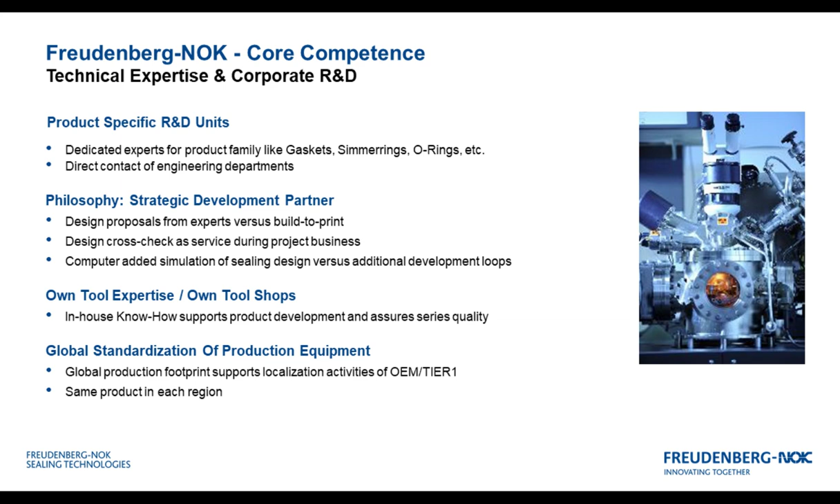Here at Freudenberg, we are the inventors of the radial shaft seal, known as the Simmerring throughout Europe. We've worked with our customers for decades, perfecting technologies that help address the most challenging issues with the internal combustion engine, whether that's weight reduction, fuel and friction reduction, aggressive media, aggressive oils, or high temperatures and speeds. We've been able to meet those market needs.

As the industry goes through transformational change to alternative powertrains, we are seeing some of those same challenges in this market. But this change is also driving considerably new needs for materials and products that can address these new technical issues. So I want to briefly talk about the market and how our company is addressing the shift away from the internal combustion engine.

Here we have a prediction of powertrain mix between fuel cell, battery electric vehicle, hybrid, and internal combustion engines, going up to 2035. Although no one knows the future, we can see the trend of e-mobility is already happening and gaining momentum. At Freudenberg, we see three different forces driving these changes: governmental regulations, new players in the automotive market with lots of funding behind them, as well as societal change.

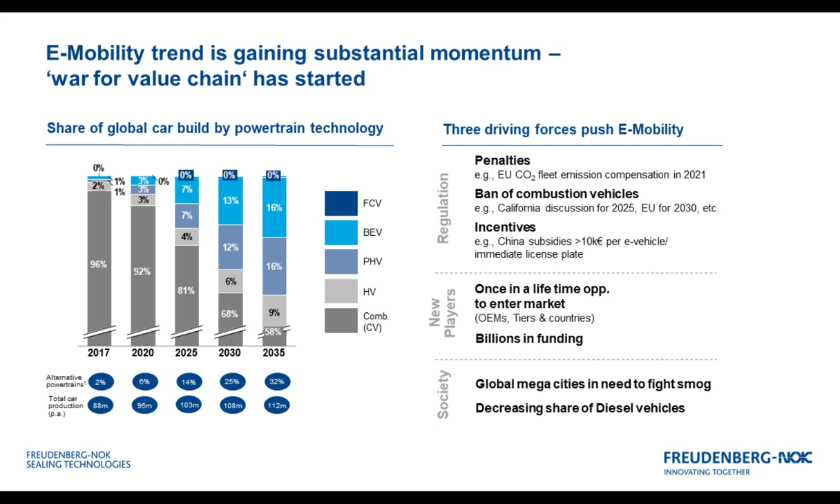In the transition to electric vehicles, we see at Freudenberg two key applications that are disappearing for us, and those are engine and transmission. As you can see from the product portfolio here, there's a variety of seals, a variety of products that we make that will no longer be around if there's no transmission, if there's no internal combustion engine.

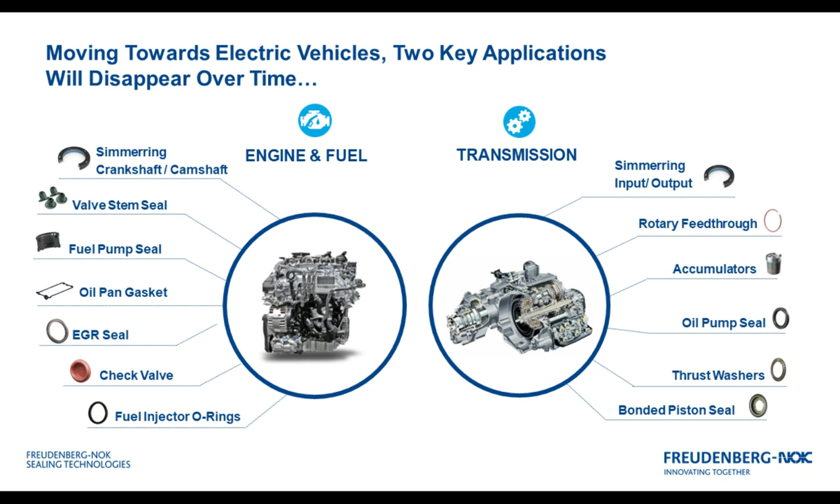With those applications going away, we see a significant erosion in our sales. In our worst case estimations, you'll see on the left here a complete internal combustion engine vehicle market going to a battery electric vehicle market. We could potentially lose 70% of our sales if we did nothing to meet those market needs.

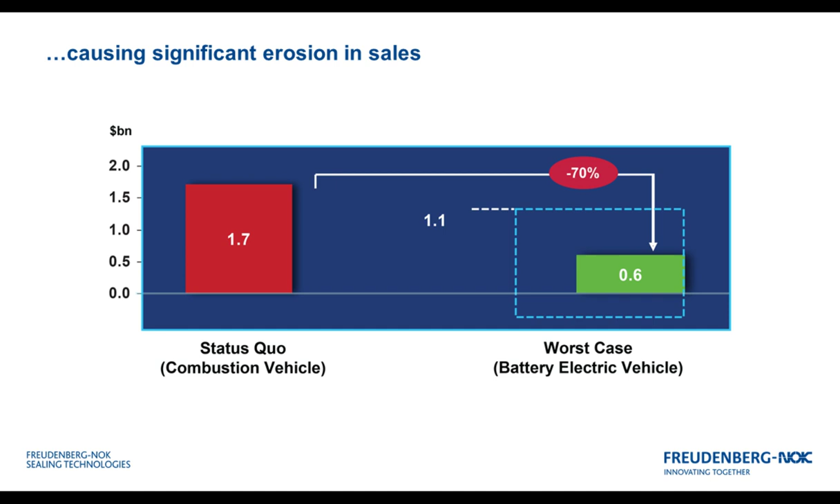Fortunately, at Freudenberg, with a 169-year history of successfully reinventing itself, we are doing that again to meet these new market needs.

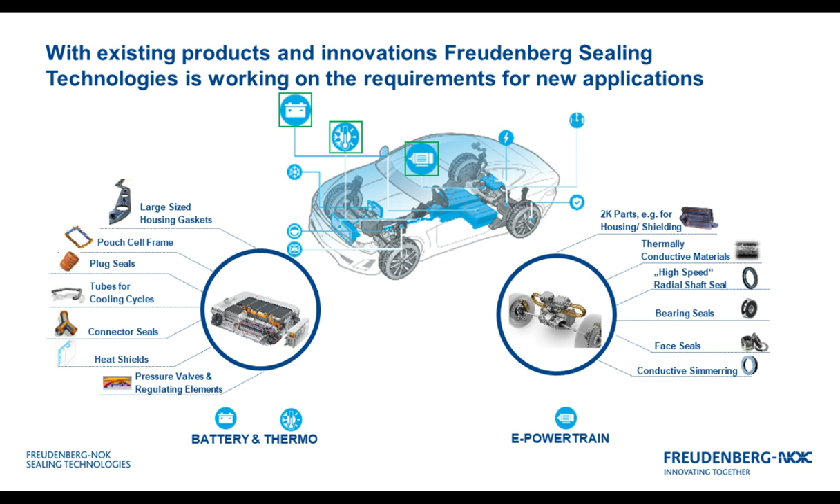With our new products and innovations that Freudenberg has used existing technologies to come up with, we have developed a product portfolio focusing on two specific segments within battery electric vehicles: the battery and thermal management systems, as well as electric motors and e-powertrains. Here is some of the variety of products we make, and I'm going to dive deeper into two specific products, one for battery and one for e-powertrain, that address customer needs through this transformational change.

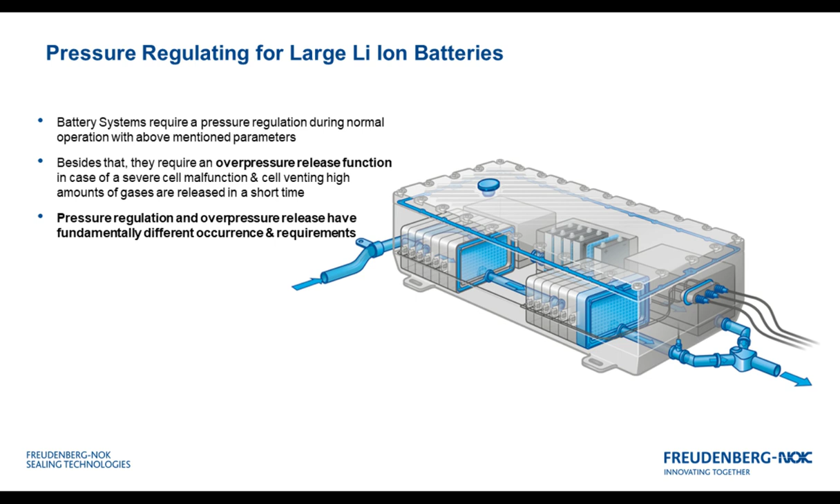One challenge our customers face is dealing with large lithium-ion battery housings. There are two main functions required for pressure regulation in these large housings. First, with any sealed housing, you need a breathable element to allow air in and out to regulate pressure during normal temperature increases and decreases. Second, a function only required for lithium-ion batteries: when a cell decides to vent, it releases a large volume of very hot gas very quickly, requiring an overpressure release function to release this gas and maintain low pressure within the battery housing.

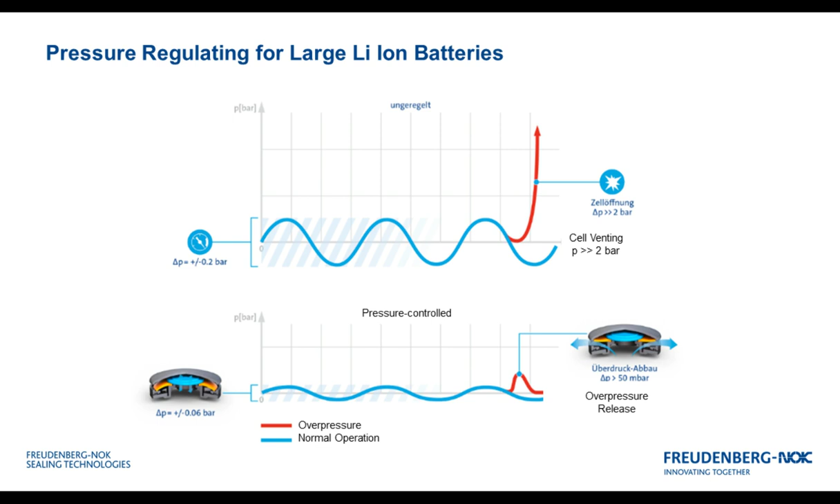Here on the bottom is a pressure-controlled housing, where during normal breathing cycles or daily temperature cycles, you see small pressure differences in the housing. Then in the event of a lithium-ion cell venting, you see a small pressure increase, but no overall pressure gain, preventing damage to the housing.

Here you can see the way we accomplish this pressure regulation at Freudenberg - a technology we call the DIAvent. This is a cross-section of the DIAvent, where both functions of normal breathing and overpressure release are accomplished within the same unit. That first function of breathing is accomplished by this pressure regulating section, a breathable nonwoven membrane that allows gas in and out of the housing to regulate pressure during normal daily cycles. This will also not allow any dirt, debris, or water into the housing.

The secondary function is accomplished by a silicone umbrella valve, pictured here in orange, that will open up and allow a large volume of gas to be released very quickly. Since it's an umbrella valve made of elastomer, it will come back down and seal after that large volume of gas has been released, maintaining that seal. This unit is rated to IP 6K9K, so we can maintain the integrity of that battery housing.

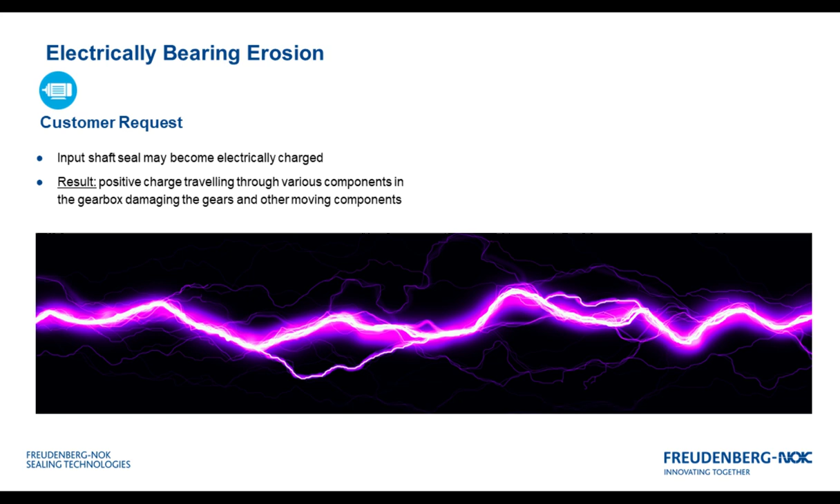So we've actually developed 3 different generations of this technology, varying in electrical resistance from the shaft to the housing, from 1,000 ohms to less than 1 ohm. And we do this by varying the material of that carbon fiber nonwoven in our design.

And we've even found that our generation 3, which we estimate around less than or around 1 ohm of resistance from the shaft to the housing, has even been beneficial to our customers for insulating electromagnetic interference from leaking out of a housing between the rotating shaft and the housing, where your traditional radial shaft seal is located.

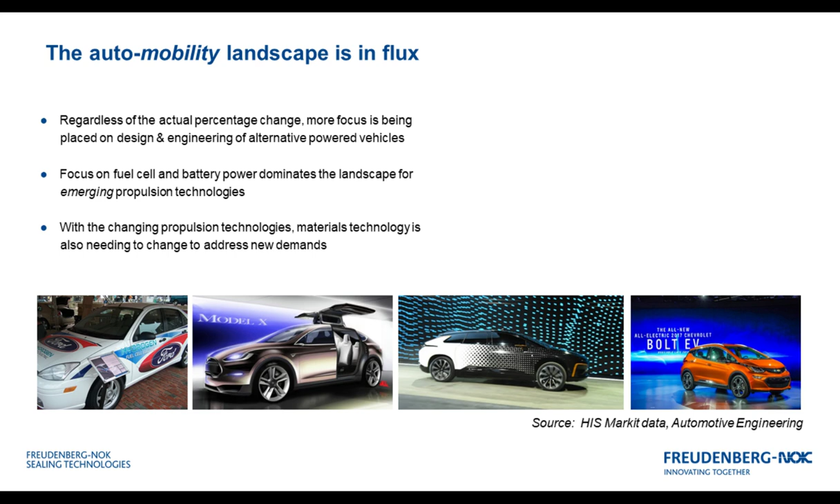At Freudenberg, we see an increased focus on fuel cells and battery technologies, which really dominate the current emerging power landscape. These changing propulsion technologies drive changes in material technologies that also have to advance at as rapid a rate as possible to address these heretofore unknown demands.

There are many needs for advanced materials during the evolution of this new automobility marketplace. A few of these opportunities are presented here. Let's look at some of the key opportunities.

So first, we see the battery. We see that sealing the battery elements and thermal shielding and thermal management are all opportunities.

Next is the need for smart materials. These materials not only provide a traditional sealing function, but also allow communication between the seal and the vehicle controllers, not to mention the whole Internet of Things relationship and metadata that can be obtained from the vehicle. I'll discuss this in a bit more detail in following slides.

The motors themselves present some demands for new materials as well. One such demand is for the elimination of electrical interference, which is important for sensors and also the entertainment system. And Mike just talked about that with some of the e-nonwovens that we've got. So another one that I'll address in more detail later in the presentation.

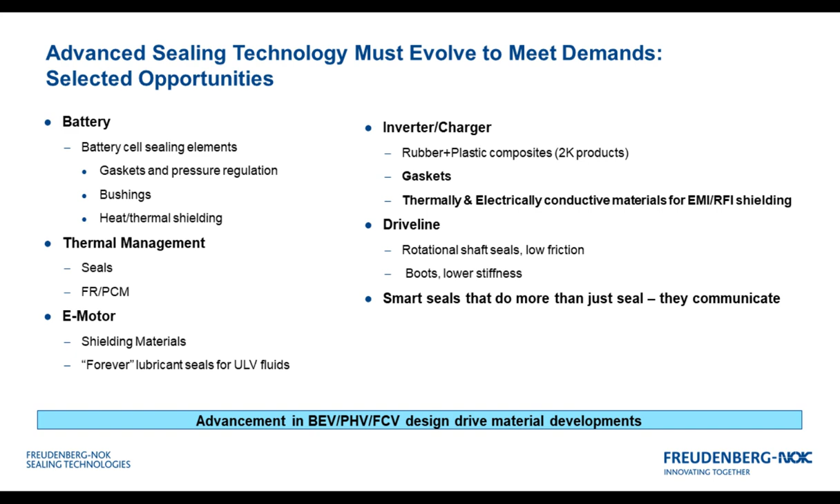In the driveline area, the challenges are for lower friction seals, lower stiffness boots, etc., all to minimize the power demands during function to basically improve the overall efficiency. So thermal management is clearly a reoccurring theme, and I'll address this shortly. In general, advancements in battery electric vehicles, fuel cell vehicles, plug-in hybrid vehicles, all of these are driving new material developments.

So first, let's discuss some of these smart materials. Smart materials are materials that have augmented functions. So they not only seal, but they sense changes in their environment, and then they respond in a very predictable, reversible, and controllable manner.

Some examples of these smart materials and their functions are shown here. So you have magnetic elastomers, you have electrically conductive elastomers, you have dielectric elastomers, and then you have special thermal management systems, which could be phase change, fire resistance, extreme temperatures, or what have you.

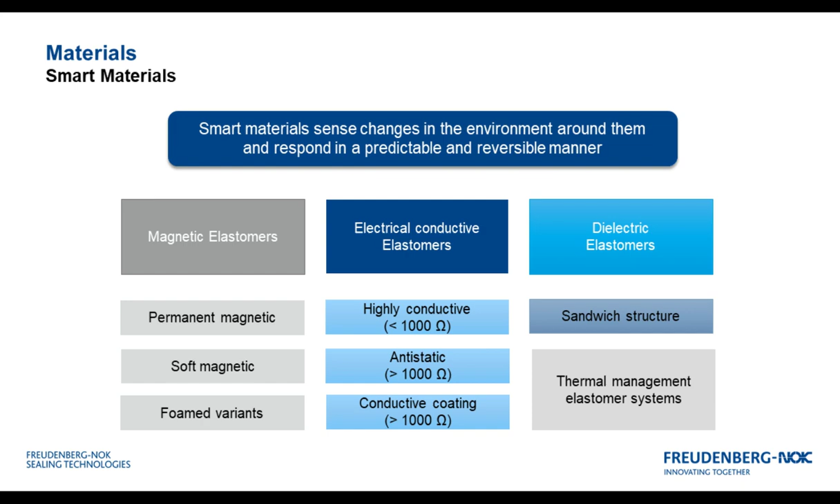So if we, as an example, look at one of these smart materials, a material that more or less gets intelligence from magnetism. In this case, we've developed a special magnetic filler. We designed this and incorporated it into the rubber and imparted some special magnetic properties. This is different than just adding conventional ferrite or something like this.

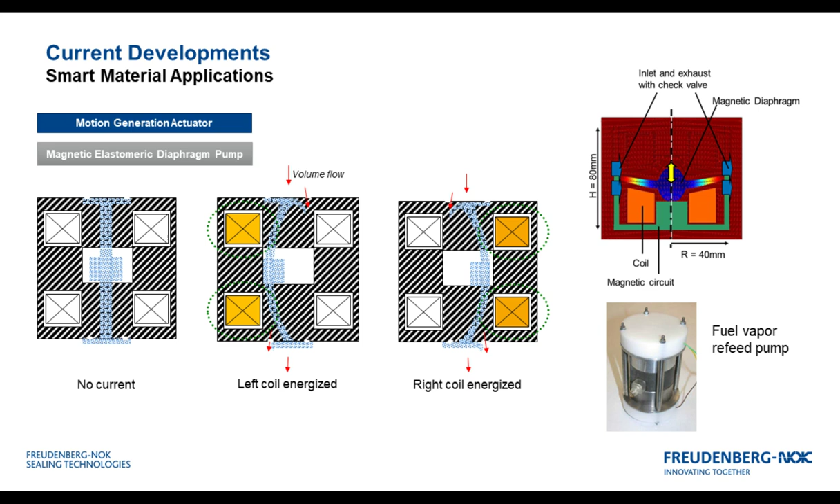This is truly unique. So by making use of these magnetic properties, now smart rubber materials enable activation of things such as sequencing valves, some of which are shown here. Signals such as frequency of activation and sealing force can now be extracted and utilized by the vehicle controller systems.

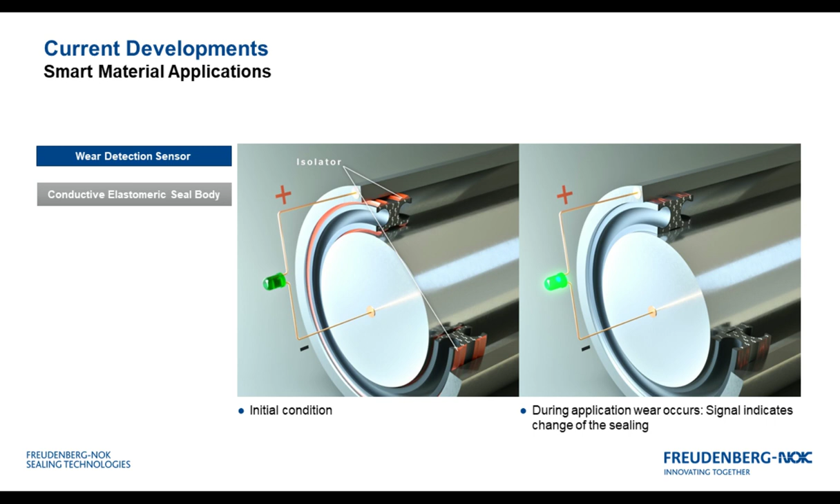Another smart material enables the vehicle to detect wear, in this case, a rotating shaft sealing element. In this application, the elastomer is a composite construction where one part is an electrically insulating elastomer and the other is an electrically conductive elastomer. The materials technology here lies in both forming the composite structure and in developing the electrically conductive material.

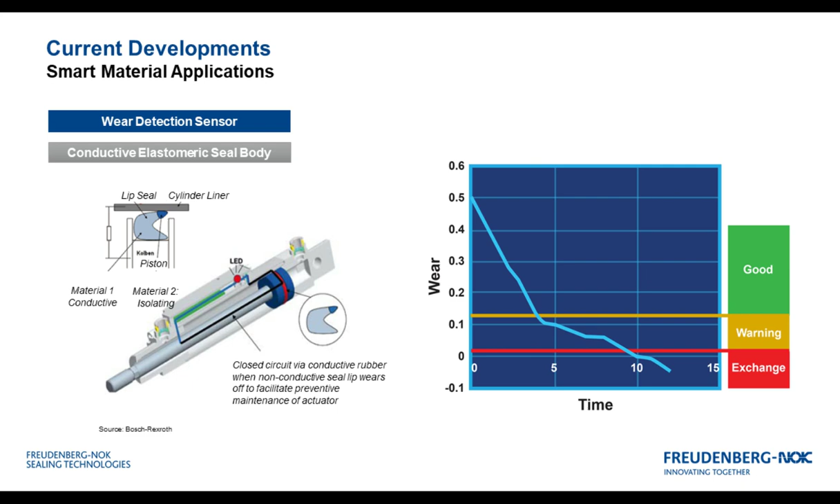In yet another example of smart materials, I'm showing an advanced dual material alloy composite for detecting and communicating sealing deterioration. In this application, the principles discussed previously on rotating seals are applied to a reciprocating seal.

In North America, we have the AM frequencies, which are unique to our world, and the reliability of these communications requires that interference be protected against so as to maintain the reliability we depend on. Smart material technologies have been designed to address this risk.

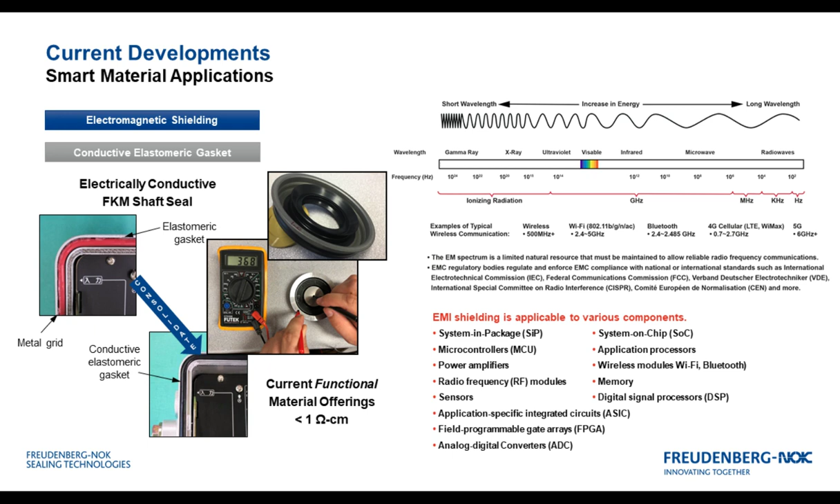Thermal management has been talked about quite a bit in our drivers, and it's increasing in safety importance as well. In the following slides, I'll discuss some applications, but due to time constraints, I've only picked the ones that are of the most critical importance.

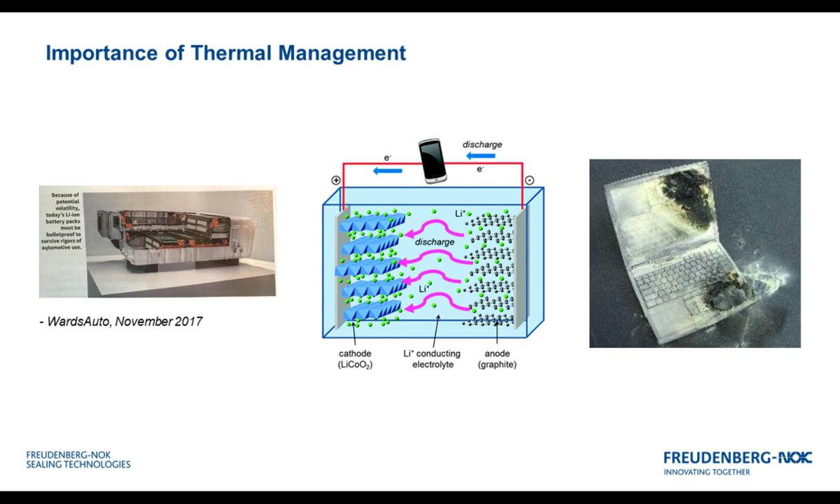Clearly, thermal management of batteries is needed, especially with lithium-ion batteries getting some unfavorable attention today. Freudenberg is developing thermal management technology to address safety concerns, as well as other battery technologies, by designing novel fire-resistant materials and extreme temperature sealing materials.

We've designed special flame retardant chemistries meeting very stringent regulatory requirements to address occupant safety. Here is one such example of a flame retardant material that was originally developed for aerospace engine applications. Freudenberg is in a unique position to leverage and really harvest its material technology from its other markets to shorten the time to market for addressing new automotive needs.

This is an example of that. This material is a composite rubber alloy with a conventional silicone rubber interfaced with a layer of an elastomeric intumescent material.

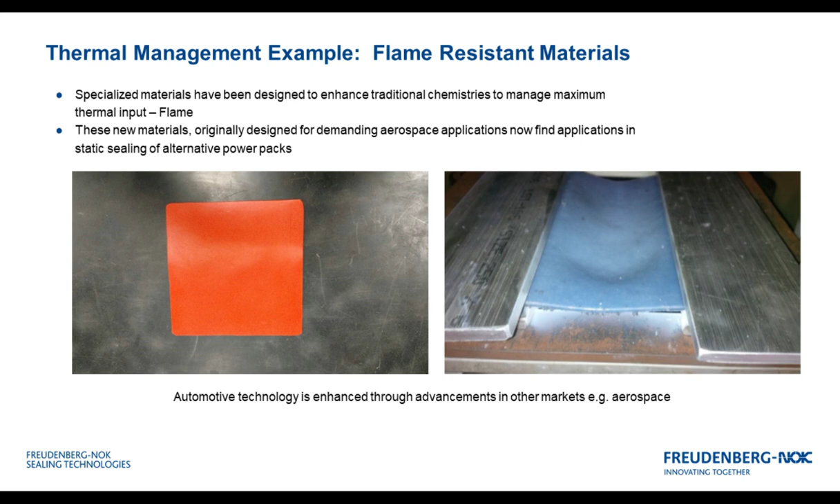Shown here is a series of pictures that show the response of this rubber composite alloy. In the upper left, you see about a 1500 degree flame being applied to the intumescent material. This thickness is only 2 millimeters. The top of the intumescent layer was 1,000 degrees cooler than the bottom where the flame was applied, in just 2 millimeters of thickness.

Shown in the middle is a conventional UL94 so-called flame retardant material that had the same exposure to the flame, and it burned completely through. The photo on the right shows the side that intumesced—this is the side directly exposed to the flame—and the lower picture is the top of that 2 millimeter test sheet. Clearly, there was substantial protection there.

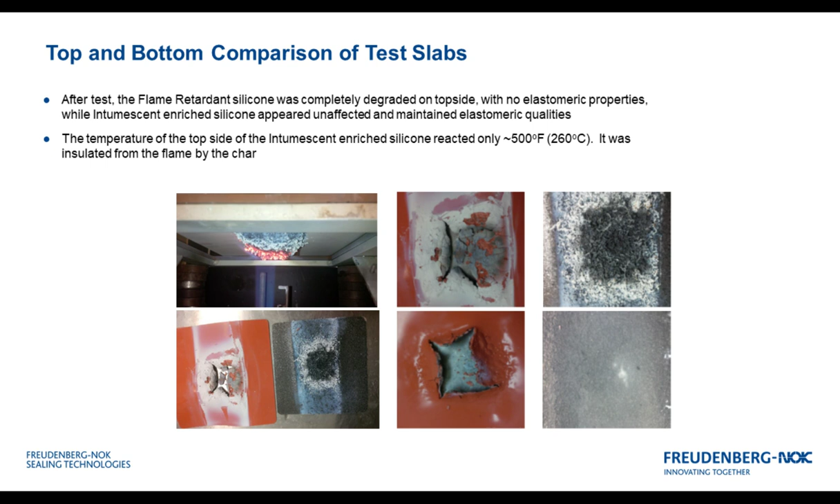The new technology affords substantial protection from raw flames in safety-critical applications with no toxic substances being liberated. This new material can be fabricated by conventional molding techniques as well as by extrusion, which is shown here. So the diversity of fabrication methods allows for a wide window of design opportunities.

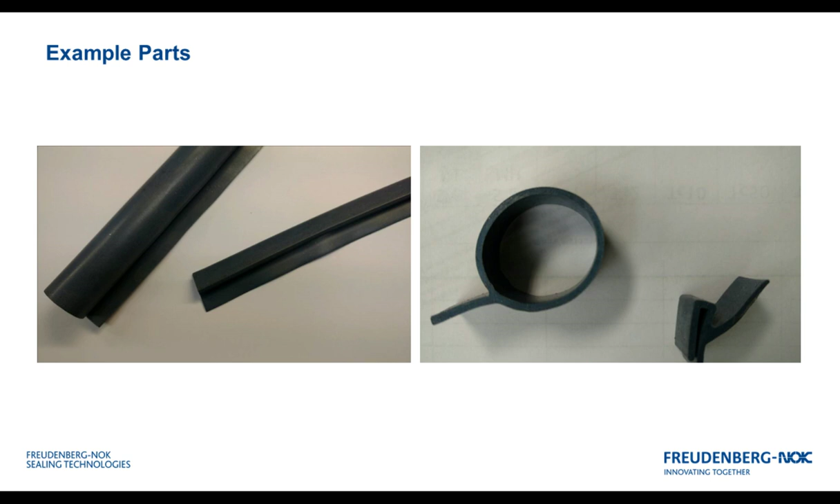With underhood temperatures as well as higher shaft speeds being driven by today's new engines, Freudenberg again takes the cue from our other markets with the design of extreme temperature seals. These are seals that are expected to continuously operate at temperatures exceeding 205 degrees C.

Here are results of some extreme temperature testing. These fluorocarbon-based compounds offer exceptional chemical resistance as well as sealability. You can see here compression sets that have been done on O-rings. O-rings were chosen because it's the most severe, after exposure to 250 C, almost 500 degrees Fahrenheit.

The values are less than 30 for the special low-temperature polymer. In addition, one can see in the upper right chart that the retained properties are very good even after 1,000 hours at 250 C, which is defined by SAE J2236 as the continuous upper temperature limit for elastomeric members. The flexibility and hardness is measurably good, so these materials would be expected to operate continuously at very high temperatures.

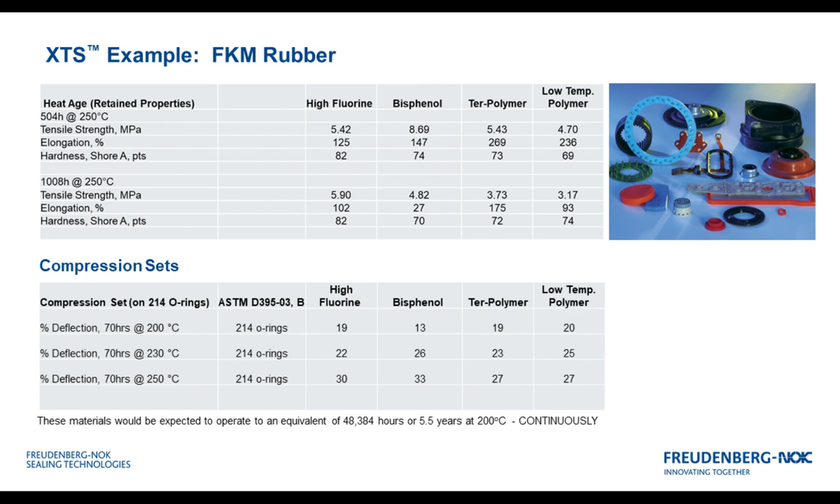So at this point, I've discussed some of the advanced materials that I felt would be of significant interest to you. My specialty has been with the rubber materials, so now I'd like to introduce Ray Sparagowski, who will continue the discussion on our new high-performance thermoplastic materials. Thank you, Joe. I appreciate that. My name is Ray Sparagowski. I'll be talking today about high-performance plastic materials.

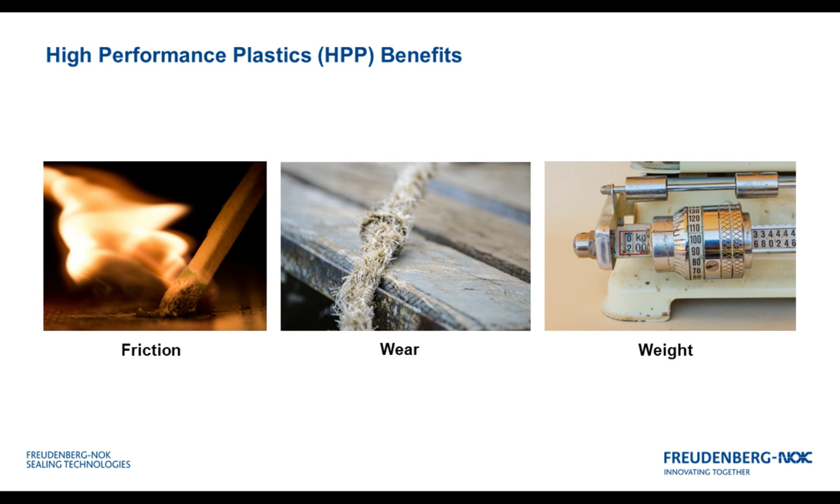These are injection moldable or compression moldable materials. My concentration will be in the areas of friction reduction, wear reduction, and weight reduction, the use of the materials to do these things, and moving these materials to extreme operating conditions, which allows you to move them into applications where they traditionally would not be used in the past.

One of the key benefits we need to use these materials and get the benefit from them is to understand the effects of wear. Freudenberg has developed their own wear standard for doing so. The main reason for doing this is to eliminate noise and variation when we add fillers to the systems, to really understand the key failure modes of these systems. That way we can know what the impact is of a filler and how that will affect the failures.

There are two key testing conditions we want to look at: dry, what we have when we do not have lubrication, and then lubricated or wet wear. The standard we developed, the primary importance is to control temperature. The data I'm going to show you today will be at temperatures at 150 degrees Celsius. That's our standard that we normally would test to.

This test method uses a disc of material with 6 grooves. This is to eliminate debris from getting into the test condition, to further reduce the noise and variation so we can understand what the materials are doing. The counter surface is a metal counter surface that can be different hardnesses and different materials. Typically, we'll use a D2 steel at a Rockwell hardness of 23. That is a ring-shaped member that goes against that disc.

It is important to note that surface finish is particularly controlled in these tests. We do not use a radial or lathe-type record player finish; we use a linear finish. This is intentional because we want this to be an aggressive test. We want the material to have to go with and cross the grain with every revolution. That's to be more aggressive, to get better understanding of wear conditions.

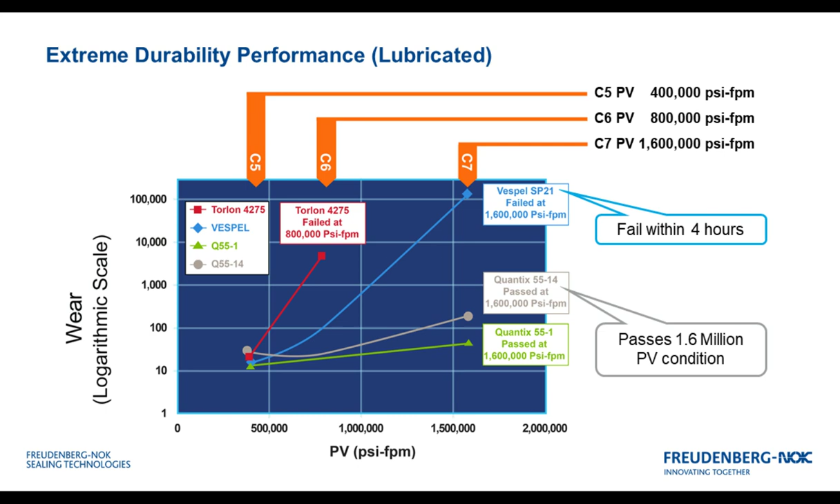We accomplish this by clearly understanding how the failure modes occur. By knowing what the fillers can do, we can develop these materials to have extremely high condition and operating performance.

On the next slide, we are looking at the effects of using the same technology in a PTFE material. PTFE is commonly used for dry applications. It has low friction, but it does not like high loads and rough surfaces. So traditionally, if we conduct a lubricated test with the Rz 7 test, you see the results we'd get on a material. In yellow is our example, Quantum 19-1. That wear rate is in the tens of thousands, very, very high, because PTFE cannot handle that rough surface, it will destroy the PTFE material very quickly.

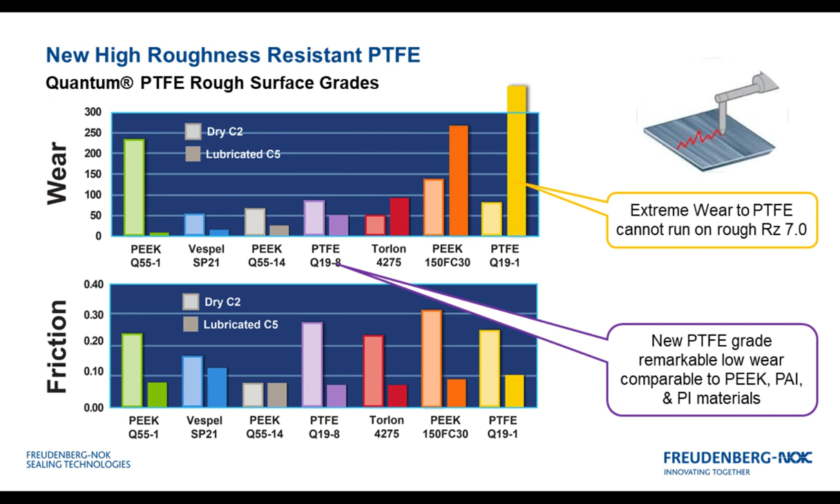But using this technology, we recently developed Quantum 19-8, shown in purple in the middle of the graph. This material actually performs wear at a level of traditionally injection moldable thermoplastics like Vespel, Torlon, and PEEK. So you can now see an extremely high roughness-resistant PTFE that can be used in applications where it traditionally wouldn't in the past. We're taking advantage of this for new applications where we may want to replace metal spacers or other items with PTFE along with our other thermoplastic materials.

Weight reduction is still very important too. As we start to look at parts and where we may have not traditionally considered using metal, plastic material in a metal application, we may be able to do so as we move to these more extreme materials that can handle wear and keep friction reduction. But they also allow us to take weight out of the system. So I've got three examples here to show you how the weight can be managed and you can take advantage of this technology.

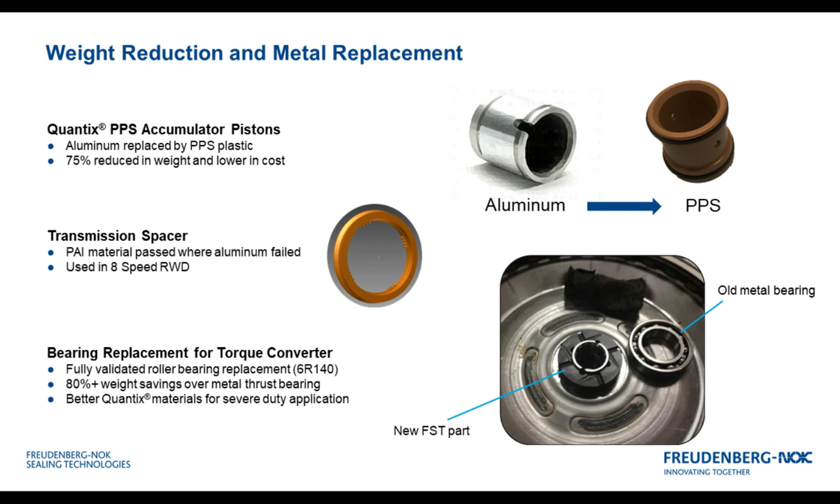These examples really rely on a lot of the material technology, but I'm going to now move to how we use material technology in combination with design to make these go even further. In the next examples, we're going to talk about two products that we have that are designed to lower friction and to reduce energy usage.

Levitorq is a low torque thrust washer design that we use. These allow us to take fluid pressure and fluid film to generate fluid films under the washers and seals, and this allows us to lower friction. So Levitex is a seal ring design using that technology, while Levitorq is a thrust washer design. We'll go into that in a little more detail in the next slides.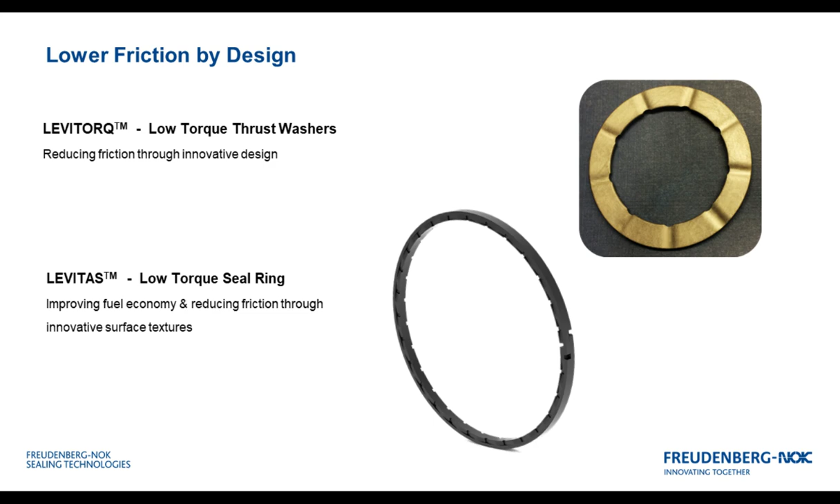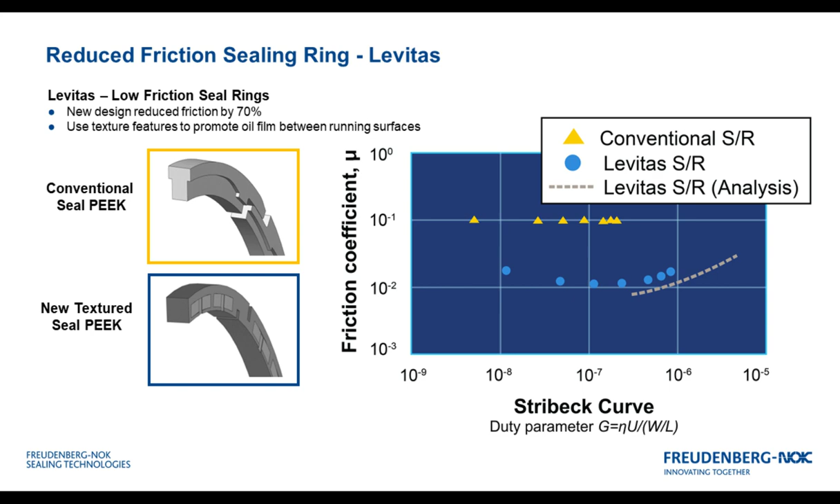The next slide is an example of how this technology works. When you look at the graphic, pressure is allowed to go into this ID geometry on the material, and is forced up a slope to create a pressure pocket. This pressure pushes the fluid under the riding surface of the seal, allowing us to create this lower friction as you change the RPMs and the condition.

We will now play a short video to show you how this actually works.

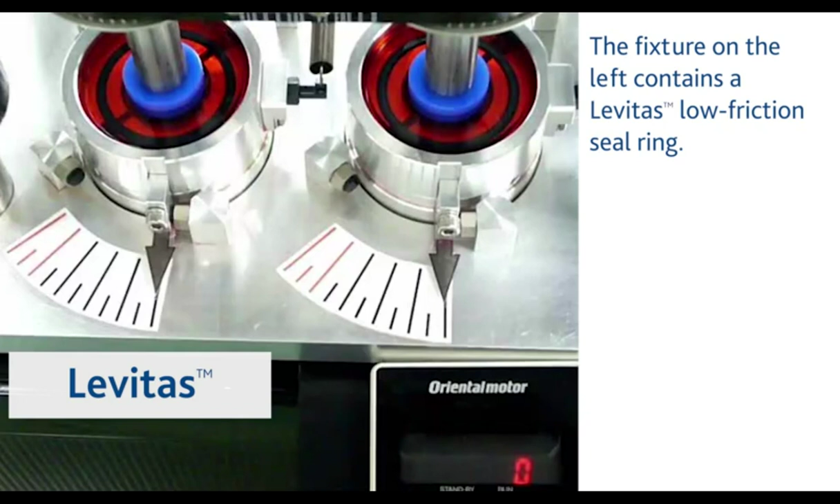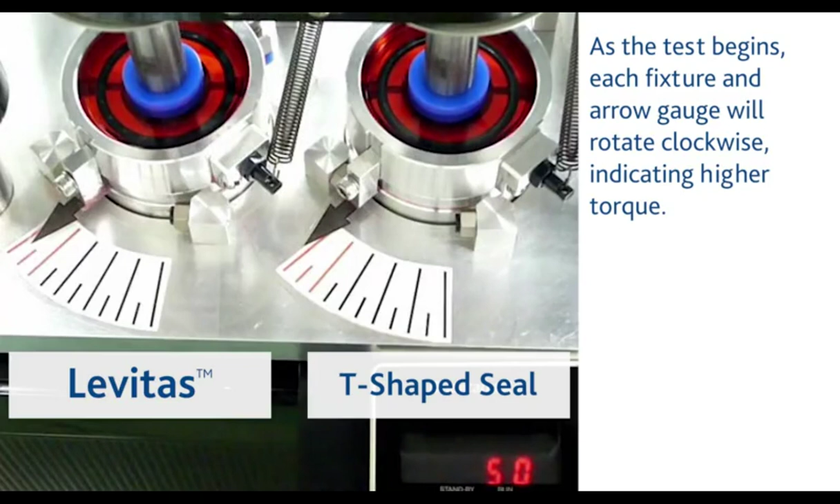The fixture on the left contains a Levitas low-friction seal ring. The fixture on the right contains a traditional T-shaped seal ring. As the test begins, each fixture and arrow gauge will rotate clockwise, indicating higher torque. The display in the lower right indicates current RPM. As the RPMs increase, there is a reduction in torque within the Levitas seal fixture. This is indicated by the arrow gauge moving counterclockwise due to lower friction.

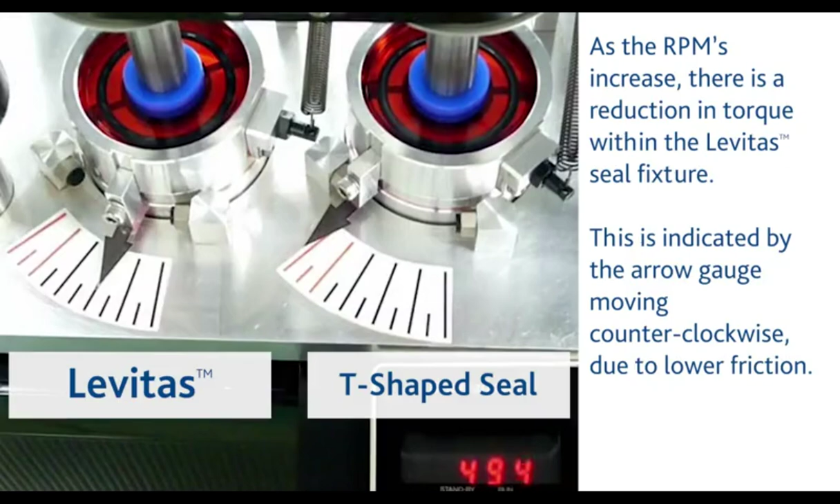So as you could see in that video, the effect of using fluid to do work to lower friction was observed. We are promoting fluid film under the seal ring, just as we do under the thrust washers, giving us this result of the frictions that you saw.

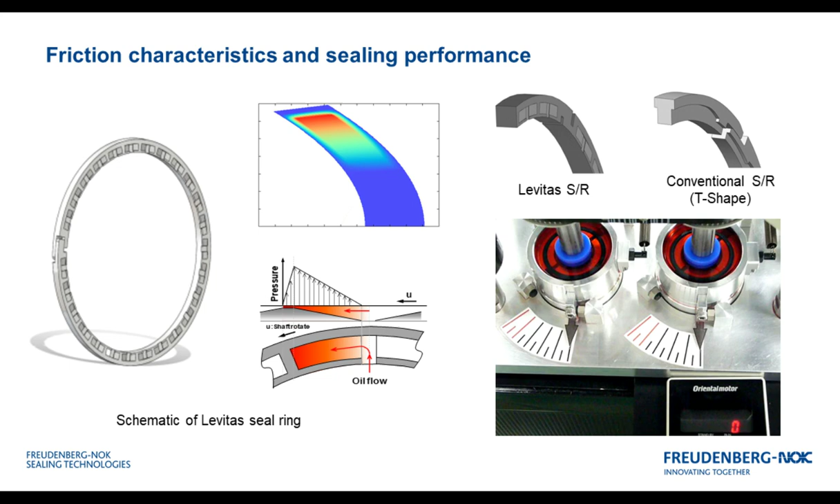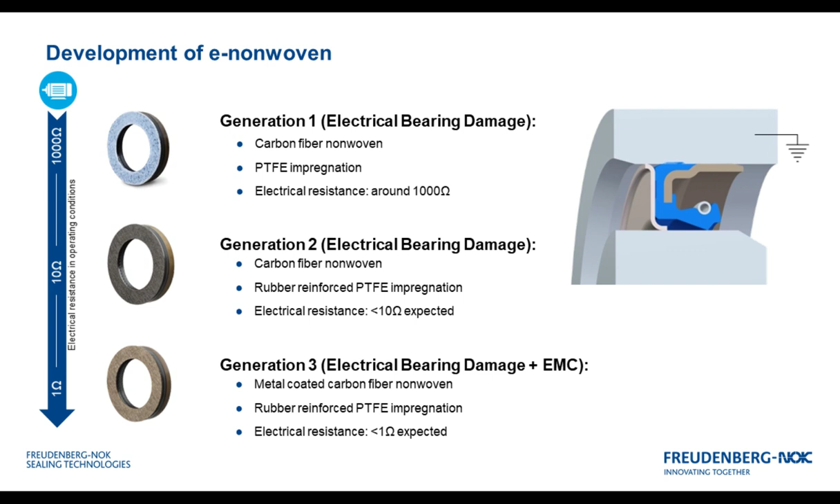Very good. Thanks, Mike. And our next question is for Ray: can these new low friction and wear seals be used in existing internal combustion engines, vehicles, and drivetrains to improve efficiency and fuel economy of existing vehicles?

We're hoping we'll be in production here shortly. They see the benefit in this technology that the material can offer. In addition, we have several customers looking not only at the effect of the material itself, but the design impacts, like the Levitas I mentioned earlier, the low friction seal rings. So that activity in transmission is actually ongoing now, and we have active work with customers.

Thank you, Ray. And Mike, we have another question about the Diavent product offering. Someone wants to know, what material is the Diavent housing made of?

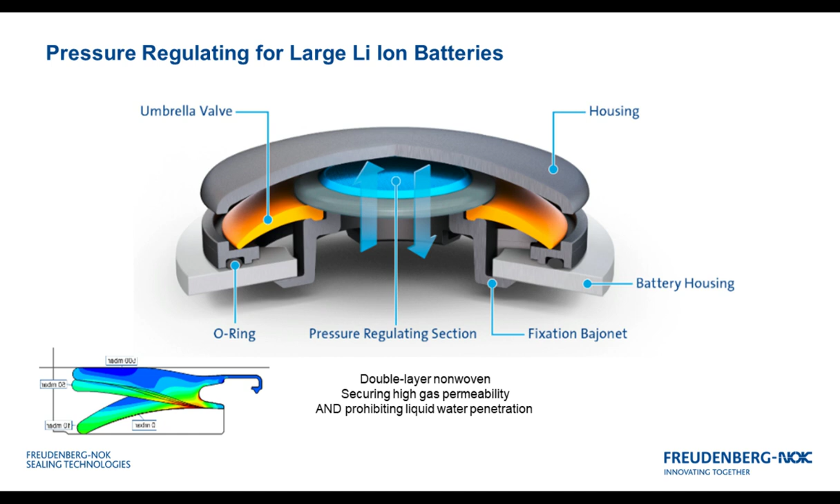Yes, thanks, Lisa. The Diavent housing is made out of PA, commonly known as nylon 6/6 material. This is a standard type of product that we've made. If there is something required for a specific customer inquiry, we can look at changing the design to accomplish both of the functions of breathing and emergency release in a unique design for a customer.

Okay, thank you. And Ray, you have this next question. How does Freudenberg's wear test results correlate to actual part testing?

Oh, good question. Well, we know that the method we use is aggressive. So when we are testing, we are concerned whether we really see the effects of actual part performance. So we end up not only doing the wear standard testing that we've talked about earlier, but we then actually validate parts, and we've seen that we can correlate the wear performance to the actual part performance. But it's important to note it really is about understanding failure modes.

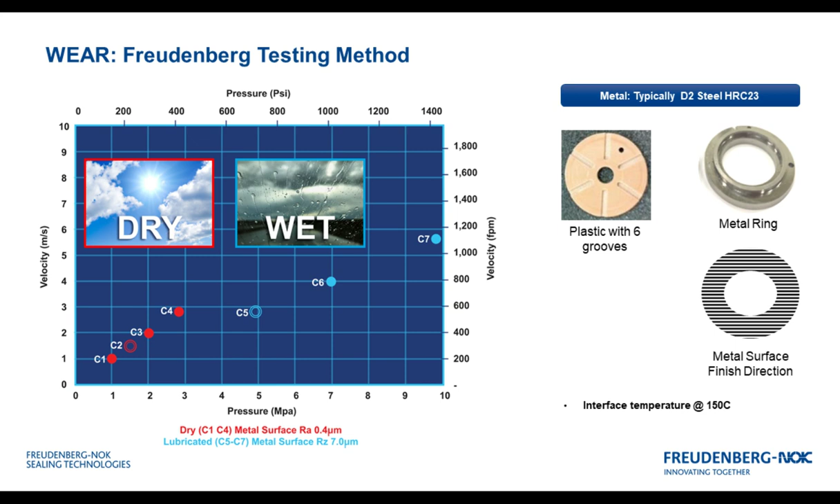Very good. Thank you, Ray. And this question is for Joe. How can the high temperature seals be fabricated?

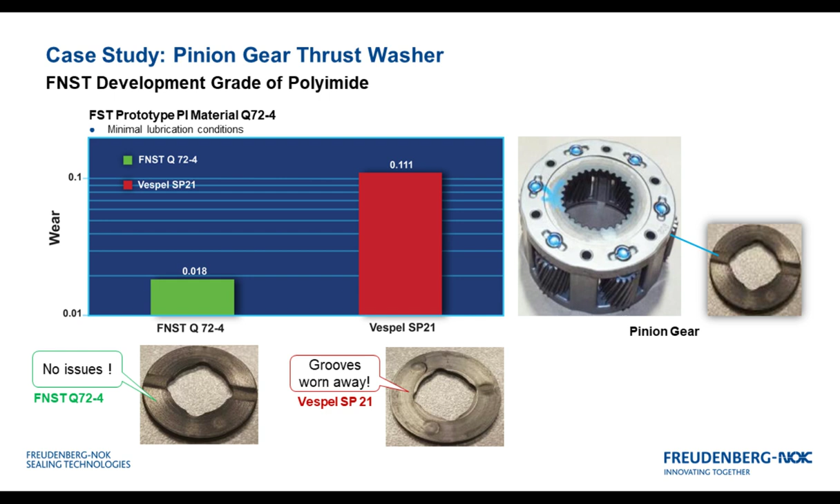Well, I showed examples of extruded shapes there, but the high temperature seals also lend themselves to all forms of rubber fabrication. That can be injection molding, whether it's conventional hot runner, open runner, or valve gated cold runner. It can be wasteless transfer molded, conventional transfer molded, of course compression molded, autoclave cured, or conventional thermal exposed cure in a pressured mold. So it really allows itself for all methods of rubber fabrication.

Very good. Thanks, Joe. And Ray, this question is for you. What effects do changes in fluid viscosity have on the performance of Levitorq thrust washers?

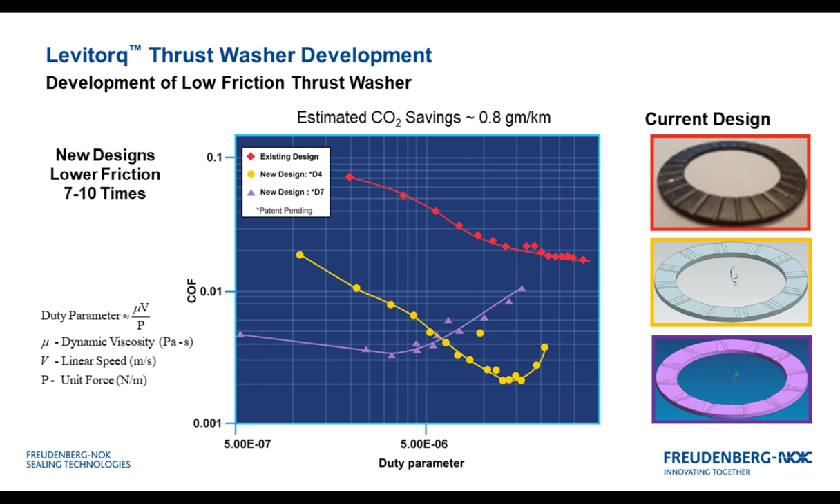Lower viscosity fluids would run much lower film thicknesses and would actually run drier, making the curve move to the left-hand side. So you have to try to compensate, because if I have a rough surface, I have to have a fluid film thickness large enough to overcome the contacts of those roughnesses. So there are very significant impacts. Very good, Ray.

Thank you. And here's another question for you, Ray. Do you see any impact on fatigue resistance with the new PEEK versus FC30 PEEK?

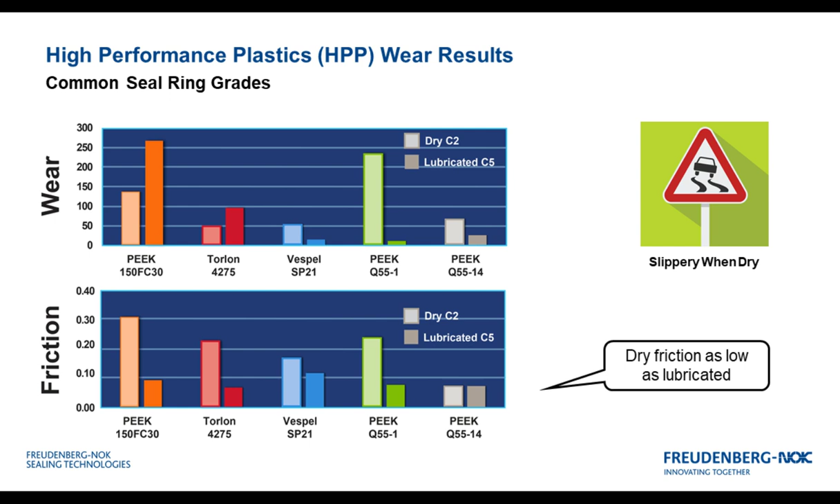But when you compare that to the 5514, that example is a material that's much more fatigue tolerant. Those are different failure modes that are tested for in different ways, so not shown in a wear and friction test here.